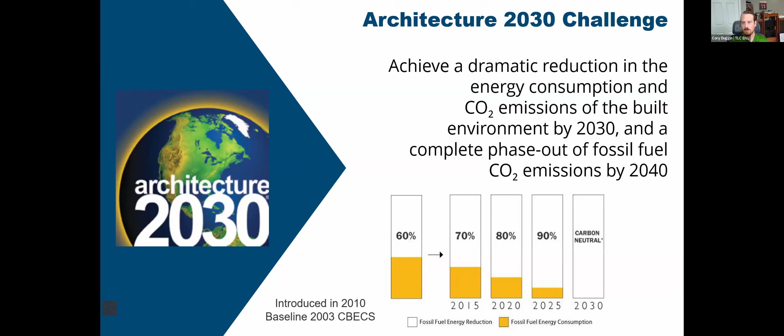The AIA 2030 commitment, that's the part that is by the AIA that we're reporting to. Everyone here, I hope that if you're not already, you'll consider and talk to the leadership of your firm to become a signatory for the 2030 commitment. At TLC, we were one of the first MEP firms to become a signatory because we felt like this was important, to also be in support and work with our architectural partners to support driving down energy use and emissions, as well as tracking and reporting that data.

One of the first things to do to get started is to create a sustainability action plan, and then look for projects that you could start with. I know a lot of folks say, how could we do this with all of our projects? From the very beginning you can look at it as just dipping your toe in the first year, trying to report more projects the next year. Don't let trying to do all or nothing be a barrier for you there.

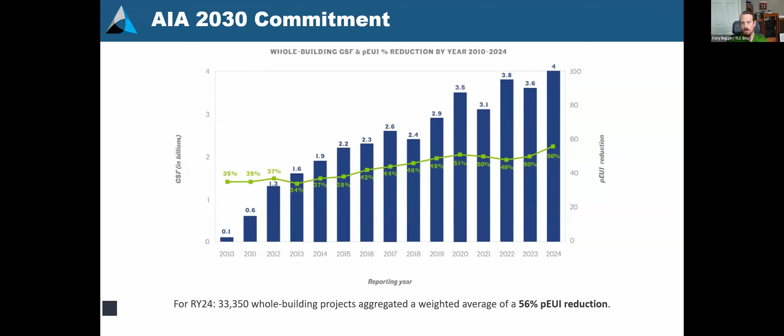As far as the performance goes, in reporting year 2024, we had over 4 billion gross square feet of building area reported at an average 56% reduction in PEUI. You can see the trend of PEUI in green across this chart. While we have seen steady increases year over year, it is stagnating a little bit. So that's something Architecture 2030 and the National 2030 Working Group are looking at - what we can do to help firms continue to push that up, and what the real drivers are. But once again, really great continued growth within the program year over year.

A few myths and facts we run into all the time: it takes too much time, there's too many resources, there's no way we can do this. Like I mentioned before, how in the world can we do all these projects? As I'm going to show you in an example going forward, it really doesn't take that long to report a project or create it. The program's free, and especially for small firms that see being a barrier - that they're not big enough and don't have enough resources.

The great thing about being part of the 2030 commitment is access and use of the DDX. This is a free tool that you can use to collect your project data and compare how you're doing. You don't have to have firm resources to build your own tool - there's this great tool out there for you to use. So I personally think that's a really great asset and reason, if any, to be part of the program.

All the data is anonymous, so you don't have to worry about any sharing as far as that goes. Making progress year over year, reporting more projects, tracking, using it as a process improvement to look at how you can make your project better - that's the real goal. Don't let 'all my projects aren't net zero, I can't do all my projects and get them entered' be a barrier. Just try to continue to improve.

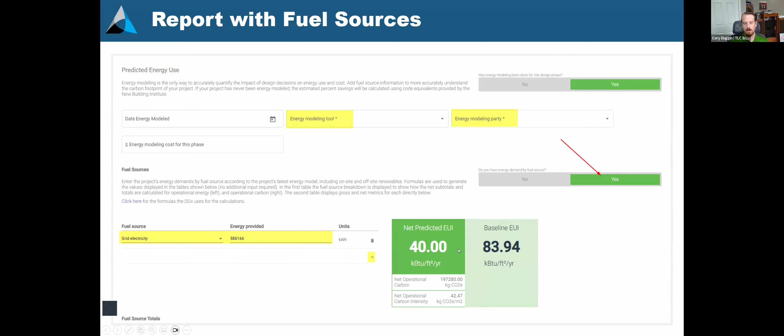I'm also going to expand whether you have energy by fuel source. A few years ago we added the ability to report by fuel source, so you can tell how much electricity versus gas is used, letting us directly calculate the carbon emissions for the project. Take those results from the energy model, plug them in here, and your actual project EUI and carbon emissions will be calculated.

If you're doing an interiors project, scroll down and click—you have a lighting power density, which you can get from your COMchecks pretty easily and input here. There is no code equivalent reporting for interiors projects, so if lighting is not in the scope of your project, it's not eligible for reporting. But if you do have new lighting, talk to your electrical engineers or find it on a COMcheck to input here, and that'll be based on the code lighting power density savings.

This is what it looks like. Now your data is updated, tells you your percent savings on that baseline, and shows the operational carbon emissions and carbon intensity—great metrics automatically calculated for you. Not a whole lot of work there.

All right, great. Thanks, Corey.

Yeah, so we'll get into the case studies. We've selected a wide range of folks here from different firm sizes, anywhere from small representatives to medium and large. They're all going to share their experience in a case study or two. Corey's going to kick it off, but when it's your turn, if everyone wants to introduce themselves and give a little background, that would be great.

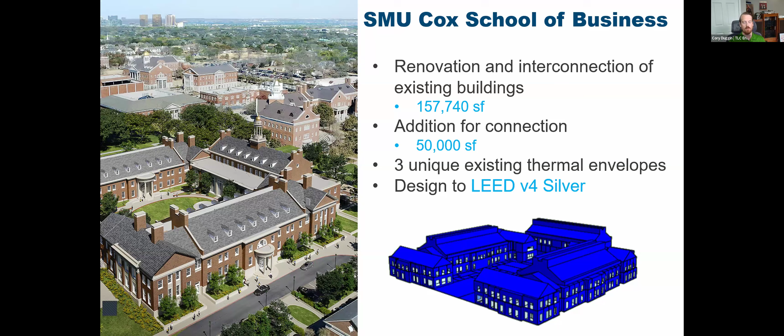The intent was to design for LEED version 4 silver certification for the project. We worked with the owner to go through a bunch of different scenarios and systems, and while we couldn't ultimately change the envelope of the existing buildings, we did look to optimize the new parts where we could, as well as connecting it to a high performance central plant.

So when we went to report it for 2030, I used the ability here to split the existing part from the new part, so I could keep track of that in the system.

I went through to look at whether there's a different building type I should use for the existing versus the new, trying to figure out the right baseline for this building. The existing pieces, we couldn't modify the envelope performance, though it was getting new HVAC and new lighting. With some limitations there, I ultimately ended up using the college university campus type for both. But that's something to consider if you have multiple types, or say a building with a small data center, you might want to break that out for a more accurate baseline.

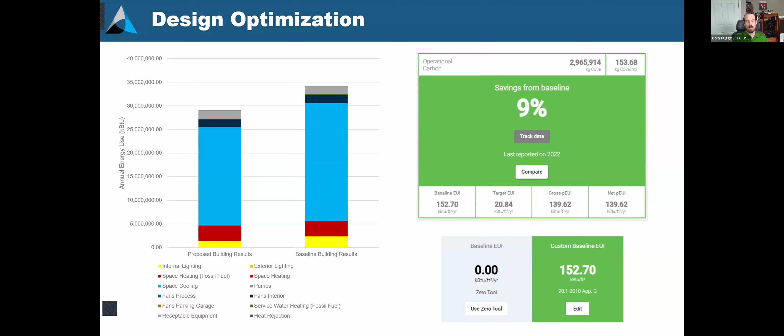That baseline is also modeling those existing building conditions, so it's really more reflective. There are certain building types we've talked about before where the default baseline just isn't great, so keep in mind you can adjust that to better reflect your project and its performance. You can see here our savings and carbon emissions for this project. It's not the most glorious project for deep operational savings, but from an overall emissions reduction standpoint and not building a new building, I think that was a huge success.

I wanted to point out that this isn't a project we were the engineer of record for, so in those cases we don't report it as part of our portfolio, but we do provide it to others, like our architectural partners.

There's a great feature in the DDx that can really reduce effort and overhead for y'all: adding collaborators. If you've got an engineer doing an energy model or an energy modeling consultant on your project, instead of going back and forth asking them to email you results, just invite them as a collaborator. Down on your project page, hit add collaborator and choose their company, and that'll automatically add their company so they can report it for you. It's a great way to do it, and it shows up for both firms.

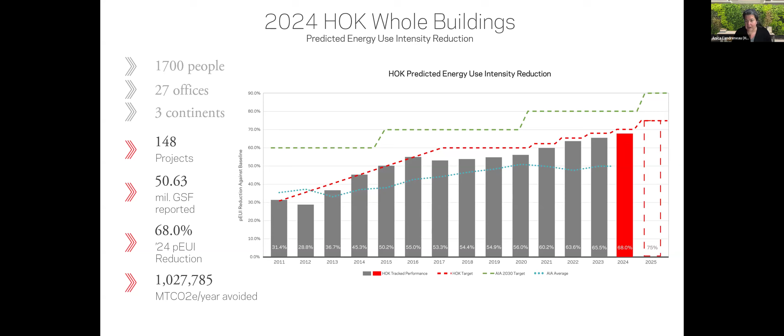The number one factor in doing this successfully is consistency. Everyone across our firm knows to expect this every single year. They know it's going to be collected. They know they need to set targets. They know that it's going to be reported out to the board of directors every spring. And that really helps us continue to make progress across the firm.

I noticed some of the attendees do come from multi-office firms. We have regional business units, and within those, we even have multiple offices that might belong to a region. We check these numbers, we track not just at the firm level, but region by region and even office by office. This is part of the data that's presented to the board, and it's not to be punitive. It's really to highlight where we may need more resources or training.

I'll call out Texas, which is comprised of 3 different offices, kind of a small, medium, and large profile. Texas always reports great numbers, they're always at the top of the pack firm-wide. But we did, when we looked office by office one year, found that one of the offices in our Texas region wasn't performing as well. And it was masked by the outsized performance in other locations.

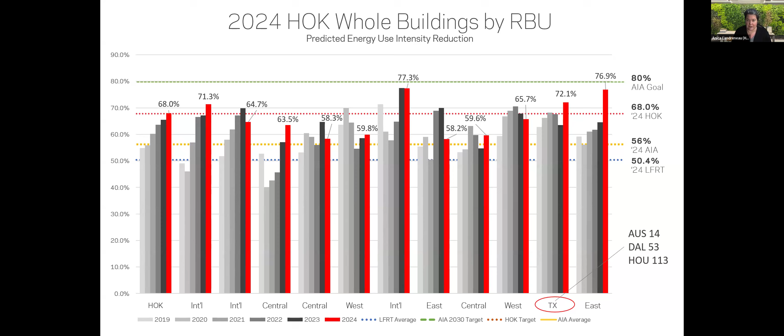So we made sure to send resources to that office the following year, or later that year, for training, to do early modeling, to engage with consultants, to understand the DDX better. And that really helped them pull up their performance. So we don't want to leave any office behind or any professional behind. We want to make sure everyone gets a chance to participate in elevating the performance of the portfolio.

We also track top projects across the firm because I think it's really important to see where they're coming from, which offices are working on them, as well as which market sector is working on them. And we're always really proud of the fact that our top performing projects cross all of the market sectors. We have top performers in healthcare, in science and technology, in sport, rec, entertainment.

These are often very challenging project types to do well in. And so it's helpful for people to see someone somewhere in the firm has done that very well, and then to cross-pollinate that information. What worked in that process? What technologies are you using? What consultants are you using? It really helps raise the performance again across that portfolio.

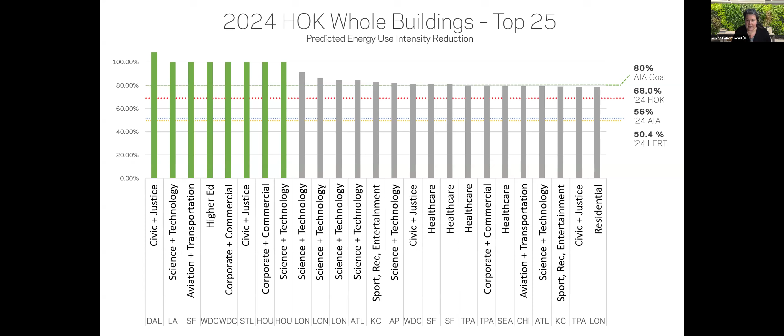And you can see here not only market sector diversity, but geographic diversity as well. And that's really how across the firm we're lifting each other up as we go year over year.

Just a couple of projects I'll share here. We are now tracking DDX as it asks for fuel source, not just energy use intensity. And that's really helpful as we pivot to a focus on carbon and emissions and not just energy performance. The more we do that, the better handle we have on the emissions impact that we have every year. Our portfolio that we reported in '24, those projects will reduce over 1 million tons of carbon every year they're in service, or over 60 million in their service life. So that's really impactful, and I think that helps keep the momentum going.

So it's really helpful to show that these numbers can be achieved and showcase that this also can translate to good design, that it's not just numbers, but it's also performance.

Another area we've tried to tackle: we started trending how our top largest projects were performing, about 6-7 years ago, and noticed our larger projects were weighing down the firm average. So we felt if we can't tackle all of these projects with the same level of investment and performance, the least we can do is tackle the largest ones.

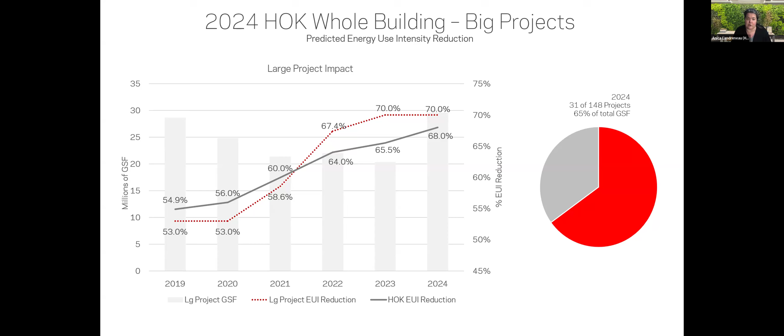Other best practices: I mentioned consistency and incremental targets. Leadership accountability—our senior-most leaders are held accountable for their performance in their studios every year, and this is shared back at board of directors meetings as well as core board meetings. The market sector and region-based engagement really looks every year forensically at who's struggling and who needs more help.

That large project emphasis—we have a minimum 40-hour rule. We picked a fee threshold and said every project over this fee threshold must set aside 40 hours to do the basics: climate analysis, target setting, collecting data at the end of each design phase, and reporting it back through the DDX, plus the basics in passive design and load reduction.

We expect people to track their projects throughout the year based on their own project schedules, but we do have a mid-year gut check to see how the firm's doing and see if we need to address any issues or challenges with specific projects or studios.

We also have policies to do an LCA on all whole building projects over 5,000 square feet, and 100% energy modeling on all whole building projects, period.

I'm going to talk briefly about what I think is one of the most important aspects of success here: the value we get from energy modeling. We did a study a few years ago and found that when we invested in an energy model, the cost of that model was paid for in 1 to 3 months of operational savings in the building.

It made it a lot easier to sell energy modeling to our clients when we could point to this and say the payback is virtually instantaneous. This was published on the Department of Energy's website, still posted if anybody cares to check that out.

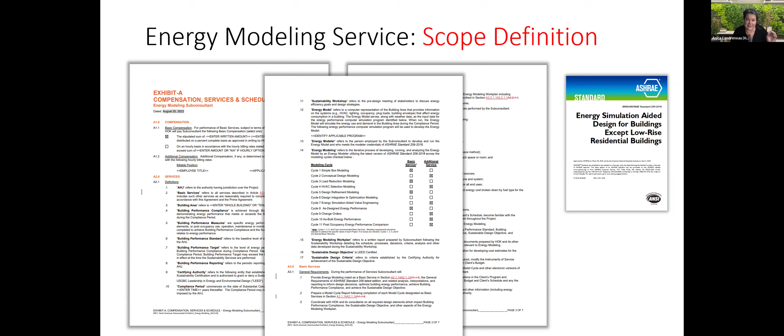We do energy modeling in-house some of the time, but a lot of the time we're working with external consultants, and we want the same level of iterative analysis throughout to support our design process.

We've also created graphics to visualize what steps of modeling we want and when, and how that correlates to commissioning—in the later energy code cycles we see not just MEP commissioning but also enclosure commissioning. This helps us integrate energy modeling and commissioning into peer reviews of our design sets early in design and throughout design and delivery.

Two of my favorite cycles from 209 are load reduction modeling and simulation-aided value engineering. So I'll just do really brief case studies.

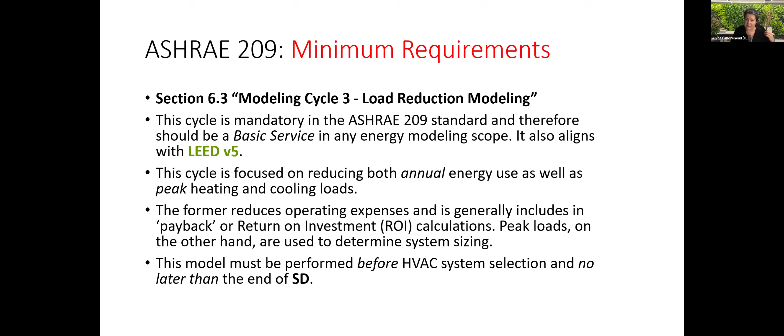Load reduction modeling is super important. This can protect some of your architectural design decisions. It also can result in immediate payback and construction cost savings when you can right-size the tons of cooling you need, the BTUs of heating you need, and the equipment that serves this facility. So this is really important—I think it's mandatory in the 209 standard, but really important to designers.

At some point our client said, maybe I don't want deep terraces. Maybe I think it blocks my view. What if we got rid of them? We were able to say, using energy modeling—both for load reduction and whole building energy performance—if you do that, you're either going down to a 50% window wall ratio and getting strip windows, or we're doing a whole lot of other improvements to the envelope to counter that.

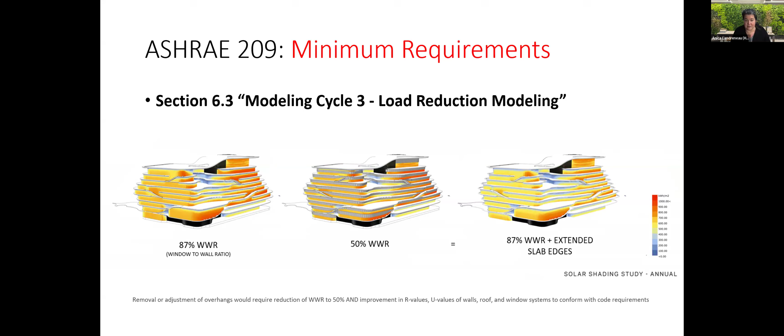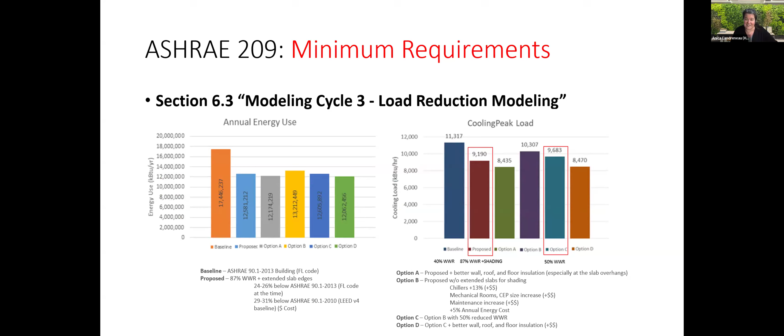The annual energy was not significant in terms of the different design iterations, but as soon as we looked at the peak loads—peak cooling—when we got rid of those terraces and deep extensions, the central energy plant, the chillers, everything jumped up 13%. The space needed for mechanical closets on every floor jumped up. The added costs from removing those terraces was significant, and the client said never mind, we're keeping them, keeping the ledge extensions, and we're going forward. The envelope's approved. So this was really helpful to preserving the architecture of the project.

The other cycle that I'll show is simulation-aided value engineering. This is a 500,000 square foot building in Washington, D.C. When we were in DD, this project's mechanical package was over budget, and I was concerned we were going to lose the efficient systems that we had selected.

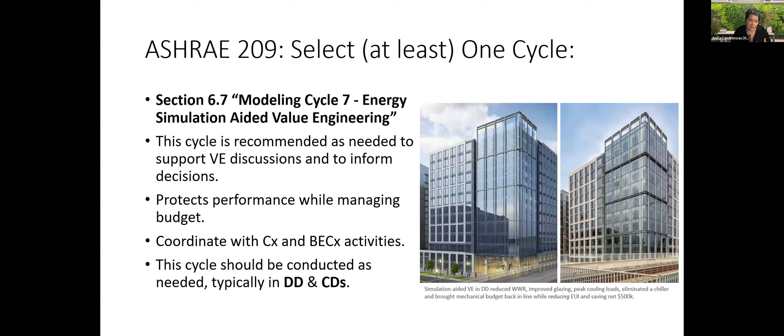Our engineer was the one who proposed it, saying hear me out—we're at a 56% window wall ratio, we could just go down to 51% vision glazing and choose slightly better glass. It's a little bit more expensive, but we're going to use less of it. We're right on the edge, and we could get rid of a chiller. This ended up saving money immediately in construction costs, and it reduced our PEUI from 32 to 28 kBtu per square foot per year. So this is actual value engineering rather than just cost engineering.

So just in summary: model early, model often, knowledge is power. We don't design in a data vacuum when it comes to our structure, our wind loads on the exterior of our building, anywhere else. It's really important that we continue to add energy and emissions feedback throughout the design process. Thank you very much.

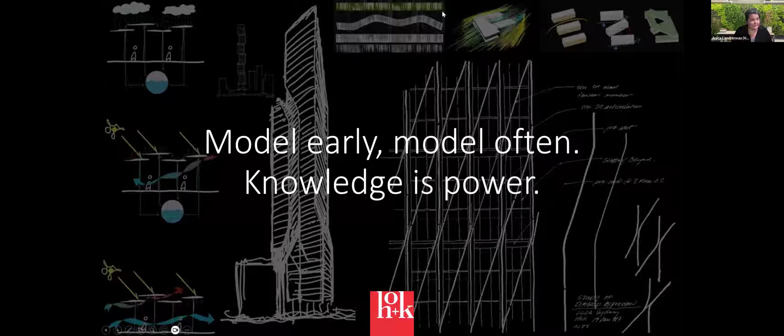I'm excited to share how we support AIA 2030. At the beginning of the year, I just wrapped up a 3-year appointment to the AIA Committee on the Environment Leadership Group.

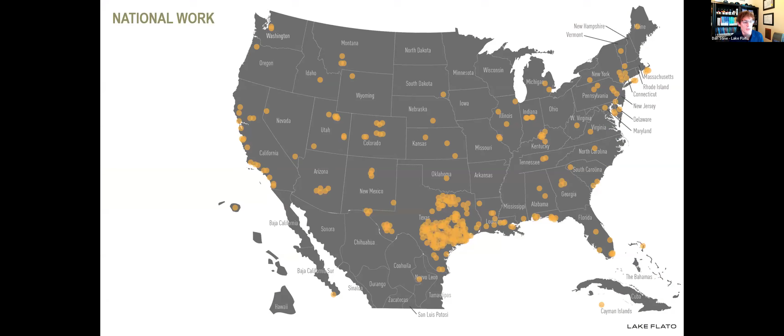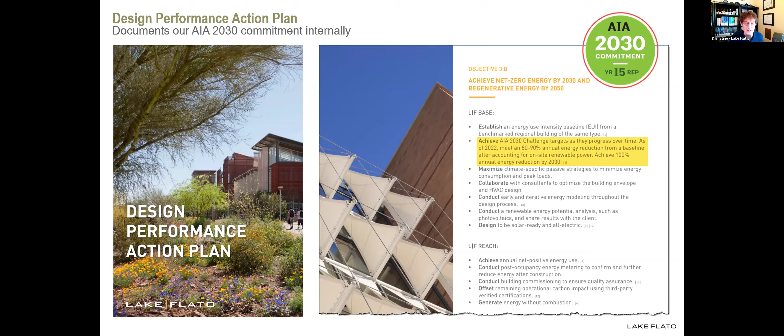About 50% of Lake Flato's work is national. As Corey mentioned, one of the first things you do with the 2030 commitment is create a sustainability action plan. We call ours the Design Performance Action Plan, and our commitment to the 2030 challenge is memorialized within this document. We're working on our 16th year—you don't get the new badge until after you've submitted, so I have our 15-year badge on the screen there. We have been members or signatories since the program's inception. We have a number of strategies and workflows in place to help us be consistent and get high quality outcomes.

So here's a strategy of modeling early and often, as Annika just said, to make sure that we're making decisions early on when things can still be modified and have impact. Here's a process for energy modeling, and we have another one for operational carbon. This is on our intranet site, so everybody in the firm has access to this.

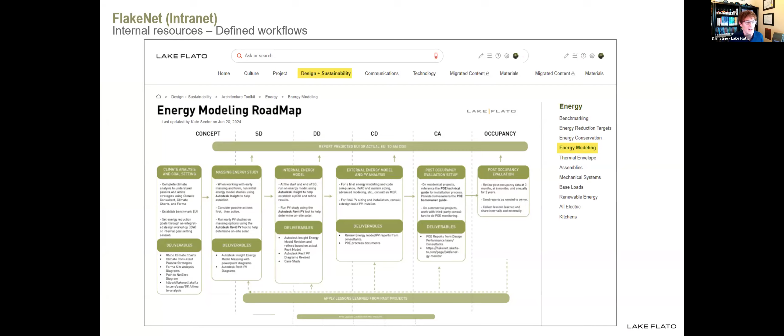The second case study I'll go through quickly for sake of time, but I want to emphasize that if you use Autodesk Revit, you have the ability to do this important energy modeling exercise with pretty accurate results, for free. You're paying Autodesk a lot of money if you use Revit, but for no additional money you can use this good workflow that uses EnergyPlus.

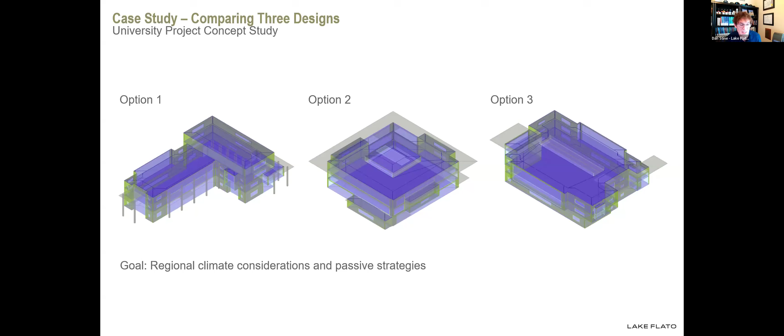A typical scenario is there's 3 designs, and we layer onto that the predictive EUI, the predictive energy use intensity, with the goal of, when it comes to energy modeling, not just reporting to 2030, but understanding the regional climate considerations and passive strategies. The differences in passive strategies for these 3 designs will be really accurate, even though we're doing this as architects and not as a mechanical engineer like Corey, who has more knowledge and more capable tools. So here's option one that we'll look at briefly.

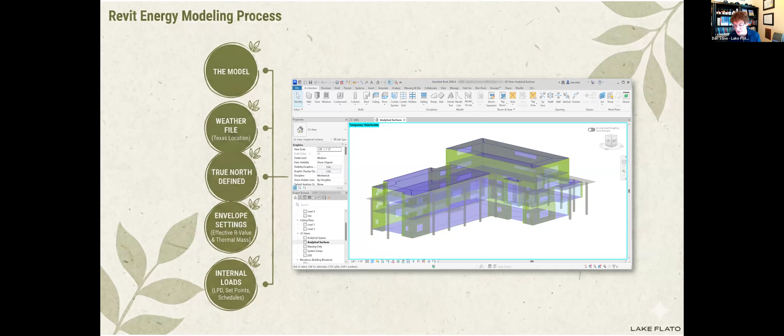In Revit, there's a series of things you can do before you push it to the cloud, which is where Autodesk Insight does its magic. You have the geometry, and layered onto that is the appropriate perimeter and core thermal zoning required by ASHRAE. I forget the number now, but the weather file - Texas or anywhere in the world, location, true north - defined using Revit's typical tool. The envelope settings, effective R value and thermal mass values, and then the internal loads. The big ones can be set in Revit: light power density, heating and cooling set points, and the schedule. Once you push that to the cloud, this is what the interface looks like.

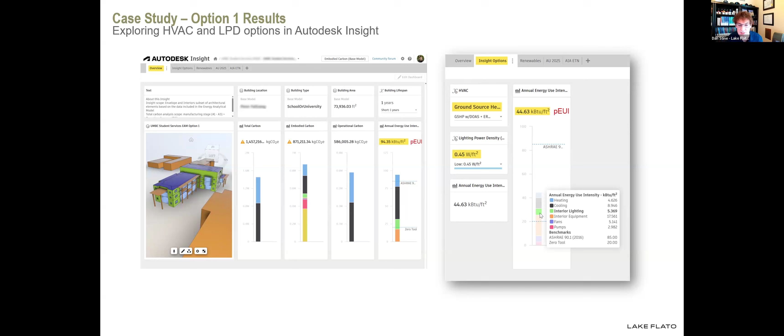There's an embodied carbon component that uses the Building Transparency EC3 database, which we won't discuss further. On the right is specific HVAC and light power density info, and there are other widgets you can add to further refine the inputs once you've gotten to the cloud. You can change the window to wall ratio without changing the model and see the results for the east side of the building, or maybe more appropriately the west side. Then you can see the load breakdowns.

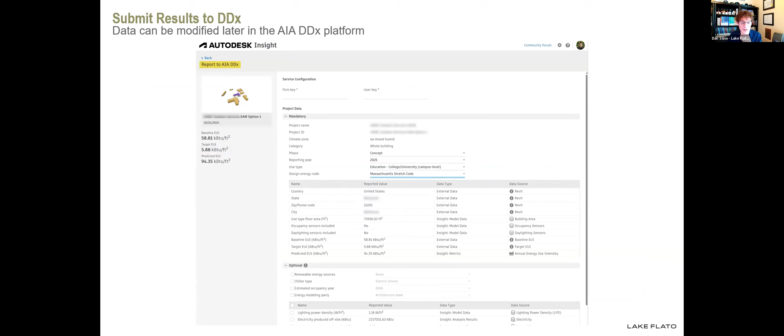Related to this Revit and Insight workflow, once you have data, Insight supports pushing the results directly to the AIA DDX. I set this - you saw Corey mention design energy code - and you can see the same thing here. I set it to Massachusetts stretch code just so you can see there are lots of options in there in addition to ASHRAE 90.1, which was one of the examples he showed.

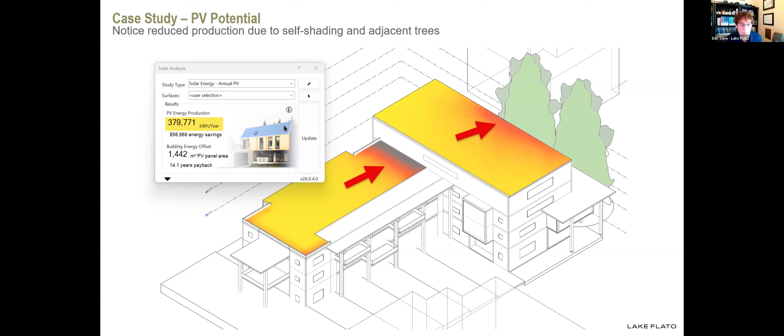Also in Revit, you can do PV potential analysis - this is a tool directly in Revit. You can edit the PV efficiency and also the area, since it's usually not 100% of the roof; it's a lesser area so you can access the panels and maintain them. Then you run a calculation and can see darker areas that are non-optimal for panels, like low roof to higher roof self-shading areas, or areas adjacent to tall trees or an adjacent building. It helps you understand how to offset the predictive EUI with renewable energy, and also how you could change the building design to get better results.

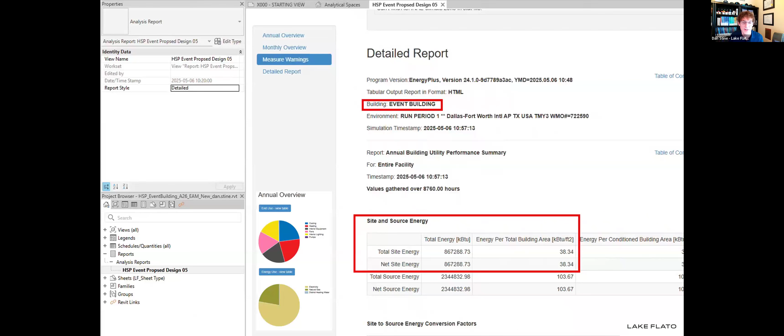In our intranet we also have an example of a small project, same design and orientation, across 4 Texas cities, looking at the differences. I don't have time to go into that one - I want to save enough time for Beth and the Q&A - but there's another option within Revit called Systems Analysis that uses Open Studio, where you can get really specific on the envelope and internal loads, and get this full Open Studio report.

Finally, if you're interested, Autodesk commissioned me to create a course on their website, Design Performance and Sustainability with Autodesk Forma, Revit, and Insight - 2/3 of it is on Forma and 1/3 is on what I just talked about. So that's all I have. Thanks.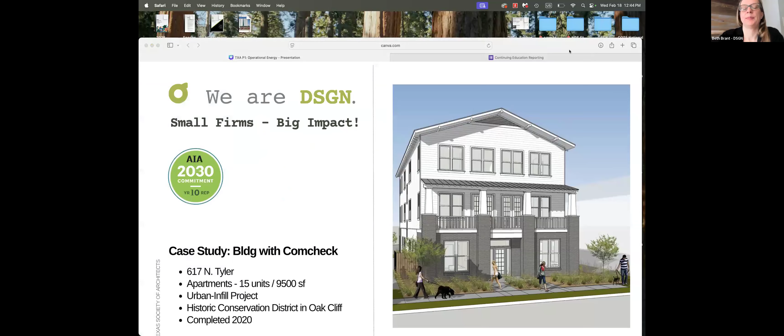Hi everyone, my name is Beth Brant, and I am a principal at DSGN. We are a firm of 11 people in Dallas, where this is our only office. So you've got the full spectrum today, as Kate said—we went from hundreds of thousands of people in a firm worldwide to a single office of 11. I'm going to go through 2 quick case studies today just to show that even a small firm can do this.

Again, my name is Beth Brant. I've been super involved with COTE for a very long time. Most recently, I was chair of the COTE network, where we meet with other COTE leaders around the United States quarterly to network, share ideas, and learn from each other. As of this year, I'm part of the COTE leadership group at the national level.

As a firm, we adopted, or accepted, the 2030 challenge early on, before I was actually at DSGN, around 2008. When I came on in 2013, we accepted the 2030 commitment and did a sustainable action plan, which is currently being updated—much needed updates. We've been reporting basically that entire time, back when it was still an Excel spreadsheet. I don't know how you all got your updated numbers, but mine's been from DDX. We've been reporting on the DDX for 10 years, and I'll talk a little about our process and what we've been doing.

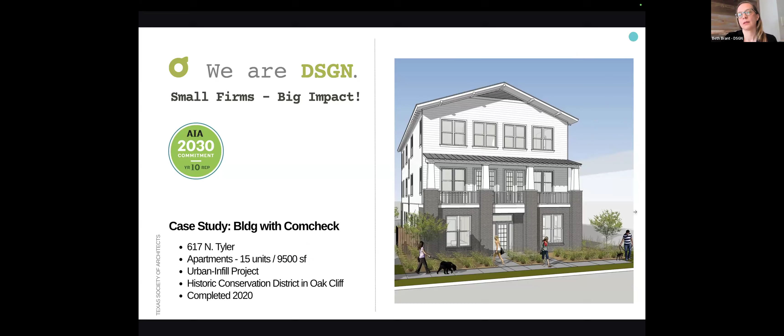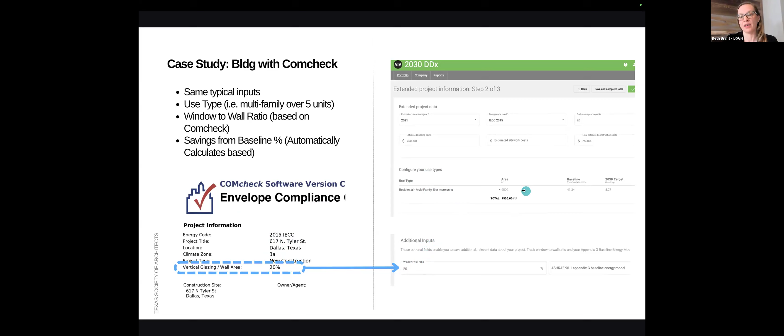As Corey was saying, basically you go to the DDX and fill out all the basic information—stuff you already know. Then you can start doing a ComCheck early on; you don't have to wait till the very end. Whatever phase your firm decides to do it in, you take your window-to-wall ratio percentage from the ComCheck and add it into the additional inputs information. Make sure you have the right building type, which in this case is multifamily, at 9,500 square feet. From there, it automatically gives you a bit better than your baseline. It's not a lot, but just looking at your window wall ratio can make a difference. That's the first one I wanted to show you.

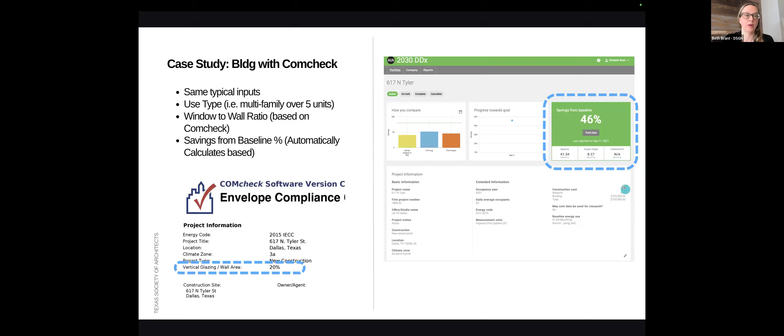The second one is we've been using Sefaira. Our office uses ArchiCAD. We do some work internationally—about 50% or more of our work, we're more the design architects, so we don't get into mechanical systems, lighting, or anything like that. For our local work, we really try to spend time to do this more analysis.

Our firm—I've tried to do reporting different ways. I used to do all of it myself. That was fine because it's only about, it varies, but maybe 20 projects at most a year, and maybe 5 to 10 of those are new projects; the rest are just updating from last year. But then I tried delegating out to all the project architects and managers in the office, which was 5 or 6 people—that didn't work so well, so I pulled it back. Now we have 3 people on our green team, and as a team we've committed to do at least 5 in-house energy models a year. We already design in SketchUp a lot, so Sefaira was a good, easy plugin to add to our SketchUp model. We have 1 license of Sefaira in our office.

I used to do all the energy modeling, but now I've empowered another woman in our office and she does all that. As far as our qualifying projects, which would be major renovations or new constructions locally where we have influence over mechanical, lighting, all of those things, that's around 5 to 10 projects a year. So we've committed to doing at least 5 in-house energy models each year.

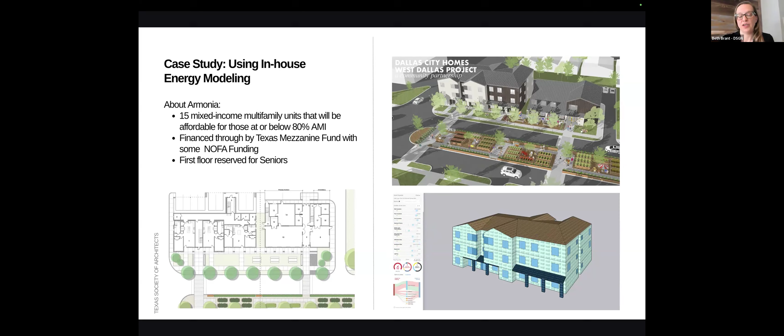Overall, it's really a 4-step process. The first thing you do is go to the Zero Tool and establish what your baseline is going to be, based on the square footage and your building type. Once you know that, that will help—and DDX will help you establish that as well. Then you run the energy modeling, like I was saying.

Once you have that baseline SketchUp version while you're in SketchUp with Sefaira, you can upload it to their Sefaira platform. From there you can tweak things—get more precise about the HVAC, what kind of HVAC you have, the zones, put in your lighting power density, even add solar, and refine the orientation.

When you're in SketchUp, make sure you're actually set to true north so it measures things correctly. You can also play with orientation while in the platform—how much better would it be if I tweaked it here or there? And then, my favorite part, you can upload your model straight into the DDX, so you don't even have to copy and paste those numbers over—it automatically loads to the DDX.

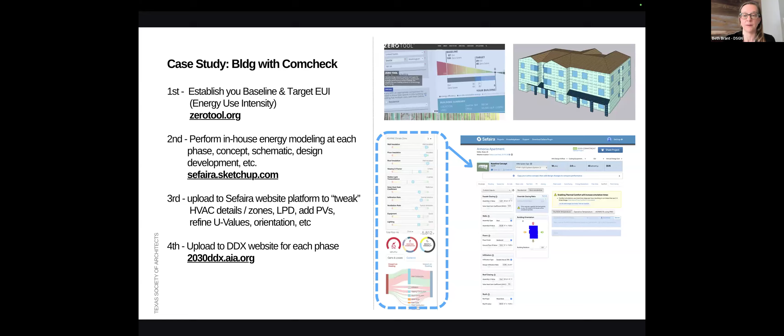With this project, we had a baseline of 41.3 EUI. It was designed doing a little bit better than code as far as our energy envelope, windows, and that kind of thing, and that got us down to a 23.1 predicted energy use intensity. With the solar that came on pretty late, we were able to get that down to 15.9.

Sefaira doesn't have solar as an option, but instead we work with the solar providers or manufacturers—they'll give us this information for free anyway because they want to sell solar panels to be installed on your roof. So I just say, hey, this is our roof, can you do a quick prediction? And that's kind of where we were.

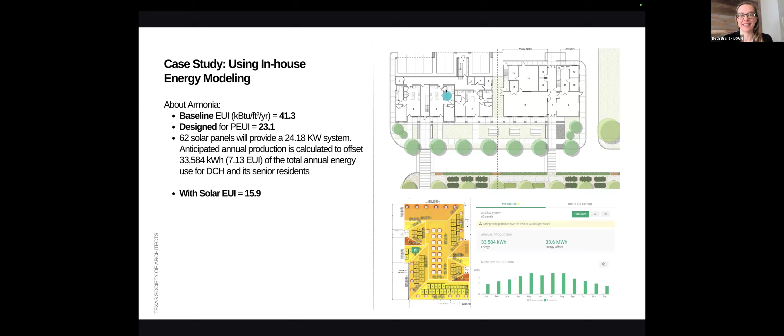We can open it to Q&A. I do want to emphasize with 2030 reporting, it's okay even if you're just doing code compliant buildings. The importance of 2030 reporting is that we're being transparent about what every firm is doing. As an industry, we want to know where we're heading and making sure we've got that average PEUI across the country or globally reported. So even if you only spend 10 minutes just reporting your project as code, that is totally A-okay. And then maybe going through this process inspires you to try an energy model on a project.

I really liked what Annika said about identifying your top project, like the biggest square footage. That's something I haven't considered, and maybe that's the one you try in-house in practice instead. I'll add to that, because in the years we've done 3 or 4 LEED projects as a firm going for platinum, we have one project that was fully energy modeled with the MEP engineer, and it just makes your firm look amazing because we just did the one. So it has a huge effect.